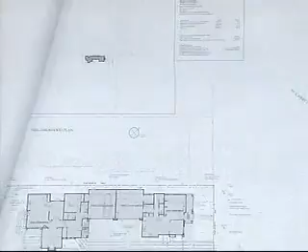There was a different applicant before - Carlos Samara was the previous designer. Does anybody else remember this? So Carlos, for whatever reason, is no longer on board, and so I'm acting as agent now to try and get it through. So let's look at the photos right here.

These are Carlos's work, which I have not seen. Does everybody know where this is?

So essentially nothing has changed from what Carlos had done, other than we had to lower the building height by a foot to meet solar ordinance. Floor plan, layout, elevations, everything is as it was in 08. Some of the windows had to reduce in height because of the reduced floor height on the lower floors, but widths remained the same.

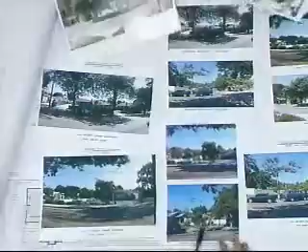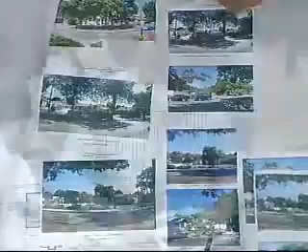So this is the existing house. Do you have a closer photo of the adjacent property to the north, the apartment complex next door? This is the first time I'm seeing these photos too, so you gotta bear with me a little bit.

It's a 2-story unit, and then another cottage to the south. And then the next property is a big church, and directly behind it is a parking lot for the church. If you look at the blow-up, it kind of shows you.

Okay, let's look at this. So this whole section is just grass, it's dirt, parking lot. It's gonna crack.

All right, so take us through the project. So 2 units, like I said - the first one, closest to the street, is a little smaller than the one in the rear, about 400 square feet less. Let's get the floor plan.

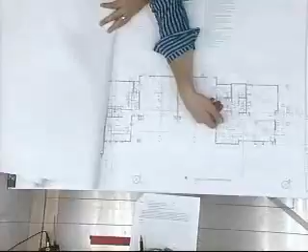3-bedroom, 2-bath, all of which are upstairs on the first unit. Come in the entry off the street, into the living room, which sort of leads you into the kitchen. Small dining, washing, drying, powder room, then go upstairs. Do you want to do it unit by unit?

Sure. I think we kind of know it's a duplex, so let's just look at the elevations. Right? Okay, and we know the layout.

So I think Carlos did a pretty good job at what he did. There's a lot of undulation in the building. We played with a lot of different roof heights, pushing walls back, pulling others forward, thickening. The reveals on some of the windows are nice and deep.

I've got details to show you - different uses of material, like the header over the exposed lintel there, and some wrought iron. Hit a lot of the main, typical details of the Spanish style that's around town.

We've got the scalloped detail on the roof, and we've also got the exposed beam. Some shorter overhangs, some longer. This section tells it pretty good too.

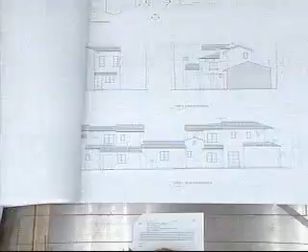We've got outdoor decks up above. The unit closest to the street steps down also from the unit in the rear, so it's less impact from the street.

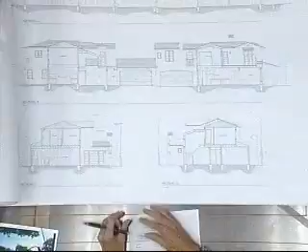Yeah, you have a landscape plan? We do, though I haven't gone through this real thoroughly - Catherine Dole, the landscape architect, couldn't be here today. But for the most part it's water-wise planting, majority of it. I've worked up the preliminary stormwater management plan, and we're working with Michael Gerenser on the calcs right now, so we'll have those for final.

Where's that? My roof plan. So going where? And when we come back in,

I'm expecting the landscape plans will be revised a little bit too, mostly on the back of the lot here where we don't have as much open space. We're going to try and retain it in cisterns and then distribute it from there to be able to control the rate.

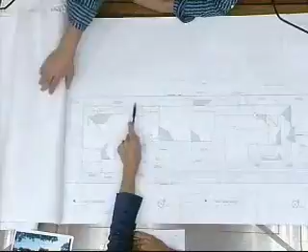Are you using any of these spaces for your private open yard space for your units? Open yard space is all in the rear. I guess the majority of the private for the one in the front would be the decks, and the front yard as well. Where's your legal private open air space? 1,250 square feet, or whatever you're required to have. Yeah, it's in the rear.

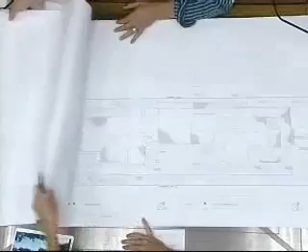So let's look at the site plan. So it's all this area. That's all for the rear unit. Well, it's for both of them. As it was viewed by the planners, it wasn't required to be separated into two.

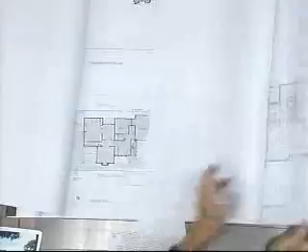Is that it? Do you have anything else you want to add? I don't think so, no. Okay.

We have public comment. Do we have anybody here to speak on this project? I guess I do, actually. I mean, ultimately, I'd like to request final approval.

Is that something the board thinks they could support? Because I've got material samples, color boards, whatnot. Do you have your final engineering? We do have final engineering. Hold on, just a minute.

So is there any public comment? Yes, we had a letter from Paula Westbury. Okay, so closing public comment and back to the board with questions, with the understanding that the applicant wants final approval.

Any questions from anybody?

A question about the street trees. Yes, they're existing magnolias right now, and we're not proposing to change them. How many are there? It's not exactly shown on the plan, at least not on the landscape plan.

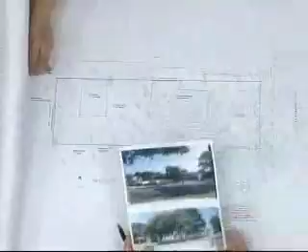It looks like 1, 2, 3, maybe. 1, 2. Is there another one in there somewhere? Two magnolias, 18 inches in diameter. You can see them pretty clearly in the photo there. And you're not modifying or anything? No, those are going to stay as is. What's to be removed is a couple of existing avocados in the rear, an 8-inch diameter ficus, and an orange. And then a hedge along here will be taken out.

Madam Chair, that's all I have for questions. Okay, any more questions?

I had one that I'm trying to answer on my own before asking it, but maybe I'll just ask it. This is the apartment complex to the north, correct, and that's that inset right in here. Correct. So I'm just looking for what is looking to that on your proposal. On the lower level, garages, and on the upper level we've pushed the building back quite a bit, so the closet and the master bedroom.

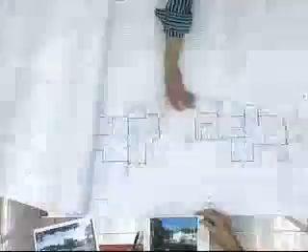Okay. And that's, and this window is, let me look on the elevations. Next sheet. This window. Correct.

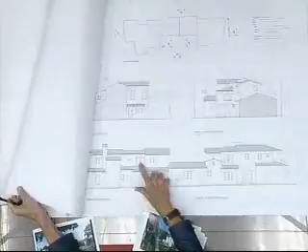I guess what I'm looking at is, even though that balcony is really close to the property line, and it's not your fault, I'm just wondering if it wouldn't be better to move that window away from that balcony, shift it down the wall. And I'll just let that remain for comments.

But any more questions? Okay, comments. Keith?

First time I've seen this, it looks like it's well designed and articulated. And I think if the board gave it preliminary approval before, and it hasn't materially changed, it seems appropriate to at least give it preliminary. It appears that most of the significant architectural details are here, so I wouldn't have an issue with final approval today.

All right, Clay? Madam Chair, I second pretty much what Keith's saying. The only thing I'm not clear on are the finishes. Did you say you had finishes? I do, exterior finishes.

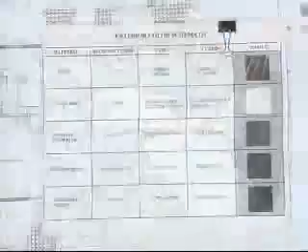So here's a palette, and I've got the actual samples, which I'll go grab. The exterior light fixtures. It's two-piece clay tile.

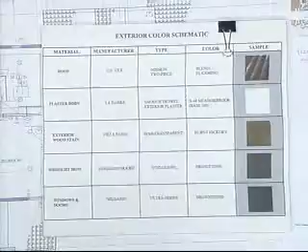Did anybody look at the window details? Yeah, they look like they would. Because it's showing Milgard. Sorry, they initially were going to use Lincoln, I believe, and then they've changed their mind to go with Milgard. So the details reflect Milgard? I'm not sure about that. No, where are the details? Let's look at those. The details appear to be aluminum clad wood. Clad exterior, wood interior, which is, I think, what they're still proposing.

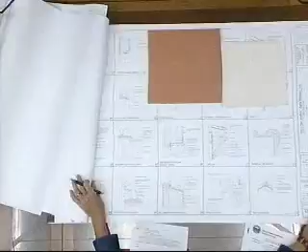Plaster. Exterior tile. There's the roof tile blend, right? Yeah, I think this shows it pretty well. I think we can see it. Okay, but thanks for bringing those in. Sure. What was this one? Exterior tile on the covered porch areas. Floor tile. Yeah.

So let's get back to the window issue. Okay.

Madam Chair, I think just to finish up my comments, I would suggest that we either go with a clad window instead of the Milgard. Those are my comments. I think the rest of the finishes look appropriate.

This was the proposed original. Not the color. The color is right. Is it going to be a black tone? Brown tone. And we weren't going to go over the outdoor living space.

That was all covered. No, we can go over it. Here, just pull that away for a second. What page do you want? The site plan? We can go to the site plan.

Tony, do we have the original site plan from the one that was submitted a couple of years ago? I do, I have it right here. What was the outdoor living space for the front unit? That's a good question, that was kind of one of my questions when we were asking questions. He said that staff didn't separate it, they just allowed him to do the open space back here, but they do have a balcony up in front on the second level.

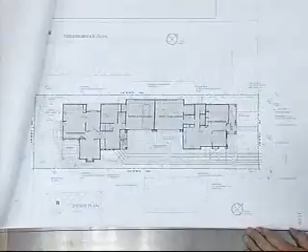The only thing I keep looking at is this little nub right here. Doesn't seem substantial enough of a planter, and I don't know what the path of travel for the vehicular is. If you can make that bigger, or at least reduce the radius of the curves, just to soften it up a bit and make it more realistic. Beyond that, I'm fine with it.

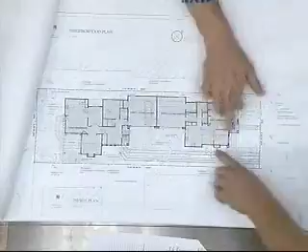Quick question though, where's the trash area? Trash enclosures, garage. Trash. Yeah, let's look at the floor plan.

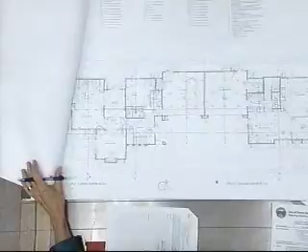No, those are meters. Okay, I'm not seeing it, so we'll want to see where the trash area goes, or make it a condition of approval. Can that be in the garage? No, because what's the size of the garage that you have? So you got a little dedicated space for trash.

Okay, I don't know where. Let's look back at the site plan. Is there any room left? Is it acceptable here? Is that not a large enough space? Except it's in front of a couple of windows, a dining nook, is what they're calling it.

All right, I'm not seeing trash on here, so I don't have any additional comments. I agree with the window comment. I'm not real keen on the tile blend either, but it's not a deal breaker for me. But I agree with the window issue and the comment Chris made about the trash enclosures.

About the softening of the radius of that little bulb out. And the biggest issue for me is the location of the trash, and I think that might keep you from getting final, but I'm not sure. I'm open to a motion, any kind of a motion, whether it's preliminary, reinstated, or what.

Excuse me, Madam Chair. The staff needs to verify that the project meets the stormwater management program requirements before a final approval. Before final, we get final and consent on it, probably. I don't know, let's see.

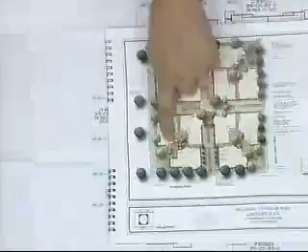Building 200 is on Montecito Street. Building 300 is in the corner - 200 is on the Montecito Street building. Building 300, I'm going to refer to as the one that's not on any of the streets. And then finally, building 400 is on Calle Cesar Chavez.

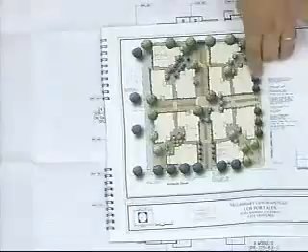Okay. Do you have any other questions, Clay, or should we go to the rest of the presentation? The plans were confusing because they weren't oriented. Right, normal, I get it.

Okay, go ahead. I guess there was a question about triangular panels somebody had. Those are no longer manufactured. There was a company called Sharp, the electronics company, that made triangle modules. They were taken off the market a few years ago because there wasn't a big demand for them. I understand the aesthetic reasons for them, but there is nothing like that available today.

The other issue I would address is somebody mentioned the glare of the panels. I brought a panel here. SunPower has a unique way that we manufacture solar cells. The traditional solar cells you've seen in the marketplace are generally blue with conductors on the front face, and this is often where you get some of the glare. SunPower developed a solar cell that has the contacts, which are these silver lines, on the back of the solar cell, so more light gets absorbed. So this is a 22% efficient solar cell, which SunPower makes, versus about a 14% efficient cell from most manufacturers.

And the way we get that is more light is absorbed, so there's less that's actually reflected off of the system. The other thing, we were just out at the site, and if the concern is the Riviera community, most of the panels are facing south, which is the optimal orientation, and that is towards the ocean. So there wouldn't be anything facing the mountain area looking back down. So most of the panels, if there would be any type of reflectivity, would all be towards the south side, which is towards the ocean.

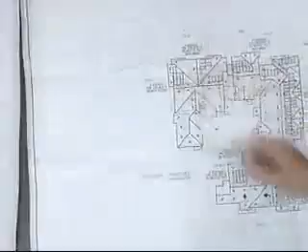And if you look at all the pictures you've given us, there's one that sort of shows how a lot of angles are happening here. And to me, it's visually distracting and very busy. So that's why we wanted to bring it to the full board.

I don't know how visible this is from around the city, but it's in a very prominent spot. If you've seen that third floor from anywhere, you're really going to notice these panels.

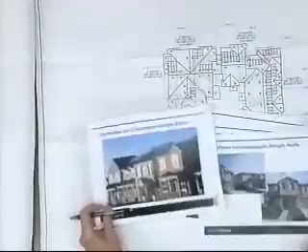It looks great when it's on a square roof as a rectangle, but once it starts getting very busy here, it's very visually distracting. And add the contrast between that and the shingle, to me, that's what makes it difficult.

Gary, you were going to say something else. My concern is also, if you look on A3...

The different roof pitches are going to require different carriaging for the solar panels, and I really think that also is going to stand out because it's going to be perched up quite a bit higher, and those were concerns.

Just a general layout of how it doesn't follow ridge lines and so forth, as most of the photographs that we have actually do follow ridge lines and are somewhat symmetrical if you look through most of the photos. There are some that are different, but the concern is that how they are really jumbled around and not very symmetrical to the building.

I would add that each of the units is getting 1.8 kilowatts, and you have to be careful, because if you eliminate one panel, each panel is 225 watts, you get to about 1.5 kilowatts, and that's the borderline, especially in a coastal area, of having enough power and voltage to turn the system on the inverter. So we want to stay in this system size range.

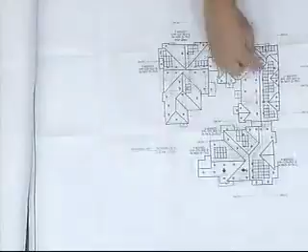That being said, it's a dynamic discussion. One of the things that may help is if we could encroach in that fire area a little bit. For example, this whole row here could be all one nice long row of panels without this kind of offset, and we could probably clean that up, but that would require somebody from fire saying yeah, you can encroach 6 inches or something.

Comments? Two questions. One of them is, I don't understand if there's an HOA involved, why can't the whole complex have one solar system instead of trying to have 1.8 kilowatts per unit? Because that's tying your hands, because you can't take one panel off of here, because then this guy's going to have more electricity than somebody else. I didn't understand that. The second question is, you have a lot of panels here because you have all-electric construction. If you went with gas for your water heating and gas for your space heating, maybe you can cut your electric demand in half, which means only half as many panels we'd have to look at, which then you can have a more pleasing layout. So if you can address those two questions.

Sure, I'll address the first. From the standpoint of why we're going to each unit, there's the California Energy Commission, the state jurisdiction, that has a program called the New Solar Homes Partnership that gives rebates to developers for doing solar, and they're pretty generous. The way to do that is to provide this solar to each unit. You can also do the common area as well, but in this case, they felt it would benefit the homeowners or occupants to hit each unit versus doing one large system, because a large system is considered more of a commercial system and has a much lower rebate, so it would be a much bigger cost to the developer. So the way the rebate structure is, you hit each unit, you qualify for the New Solar Homes Partnership. Technically it's easier because you hit each meter versus being on the front end of the meter and providing power to the whole unit. If you provided one large system to this whole building, a big user may get a bigger benefit than someone who doesn't use as much power. So this is more equally distributed.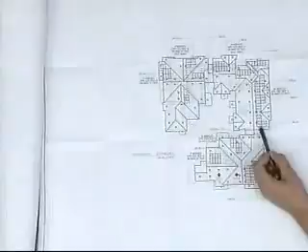And over here, sometimes you're tight and sometimes you've got a lot of room, and here you have no room. So that's something we need to study and look at.

The second thing, I'm personally not okay with having an all-electric house just so you can get 3 extra brownie points on your LEED certification. I find that there's cause and effect, and that's just me personally. LEED is a form that we follow, but it might have a negative effect, which is going to be the visual. So for the innovation points you have, it's also increasing the amount of solar panels you have to put on the roof.

Gas FAUs are very efficient, 98%, and they even have horizontal discharges, so we don't have to get rid of all gas in the structure, and maybe that'll save on the number of panels on the roof and change the design.

Our town was built on aesthetics, so I think there's a balance between the two. But to have all-electric just because that's the only way you can get LEED Platinum, and now we have to have all these panels, I think we need to study that a little more carefully.

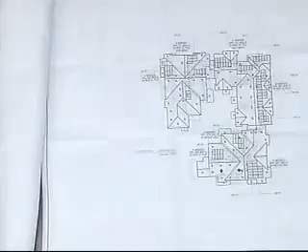You can't, because of the racking system used. Okay, that was what I was wondering. It also doesn't do the 3-foot clearance, does it? Yeah, it gets closer, but I see what you're saying - there's some areas where you can't, and areas where you do get close over here, so that's why he drew that. Right, and so that's what I was encouraging, just sort of cleaner rectangles and squares, and that's pretty much all I'll say at this point.

Okay, I don't have anything else to add. But what I'm hearing, if I were to consolidate the comments, is that everybody wants you to use solar in this project, and it's a matter of looking at it one more time as to how you're doing those panels and making sure you've gotten the best configuration and eliminated the most jogs in the arrays that you can. The other thing I'm hearing, and it was one of my requests, is just to show us a detail of where we think we're going to see it the most, which is at the roof eave, and we'll try that.

Push it back if you can, and confirm if you are creating a different pitch than the existing roof has—we'd like to see you illustrate that. So it looks like you're not going to necessarily get approval today, but there are some things we're happy to provide clarification on.

I'd be open for a motion. May I ask something real quick? In terms of adding, at some transition point, a concrete S-tile to create the access, that actually comes all the way to the edge in the back. Would there be any issue with that, so that we're not walking on the clay barrel tile?

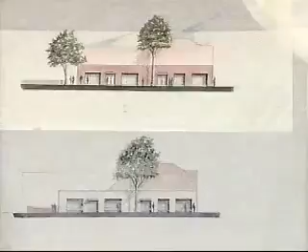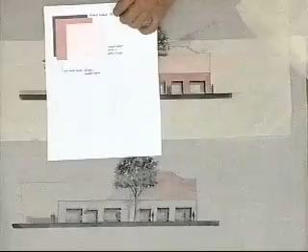Well, I apologize, my printer went dead right at the last moment. But I think the color is actually better on these illustrations here—this is what I presented last time, and this is what we're presenting now. In terms of the colors we're proposing, although it looks very pink here, it's supposed to read white with a bit of a blush—very blush, very blush. If you want to see a building with this color, it's the one on Eastleigh and State Street, that little Moorish building—it's amazing, it's white, but with these, it could be even lighter than that.

The idea is that we would go to a white color, but not refrigerator white. They would have red on it. The background color would be something like this, so I thought it would be interesting to darken the larger building so it can recede back, and lighten the building in front so it can come forward. That was one of the changes.

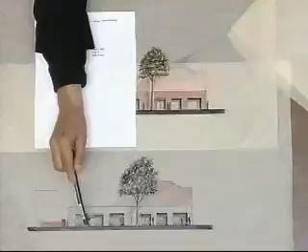As far as the doors and windows are concerned, I thought it would be easier to just get a steel unit that comes all the way down to the ground with some clavos maybe or something like that, and that's probably a cleaner solution for that.

Again, completely open from the color situation. It's tough. Colors are tough unless you get two or three gallons, put them on the building, and see how they behave. But the idea is that we'd go fairly light at the single story, and then go darker on the background of the building.

So for those of you who don't remember what the larger building looks like, there it is. At this point, there's no modifications proposed to be done to the building. Most of the windows on the other side are blocked, and I'm not sure why. When we start working on the tenant improvements, we certainly can expose them, which would be nice. I don't know if there's any code issues being too close to the property line or something. We may or may not be able to do it.

Is that it, Henry? That's it. All right, do we have anybody in the audience that would like to speak on this project? None. Tony, do we have any letters? Yes, we did get a letter from Paula Westbury. All right, I'll bring it back to the board for questions.

Thank you, Henry. On this elevation, is this an existing wall? Yeah, that's a... We have some photographs of that. That's a brick— not a brick. It's a concrete simulated brick type thing, oversized. Concrete block? No, it's not concrete block. It does look like brick, but it's not brick. It's faux brick. We don't have any more photos of it? Do we have any more photos, Tony? Yeah, it is. But we could just leave it. We were just going to leave it.

My only other question was, what are your thoughts on these awnings, these little eyebrows that come over the entry? What I was thinking is there are steel canopies that fit within the opening of the doors, and then have the pin-mounted letters. Underneath, I thought it would be interesting to have a lace pattern to create some interesting shadows. I think the maximum we can project on those is 36 inches or 30 inches, I'm not sure, but that's to carry the signs, as you can see in this illustration here. Okay, thank you.

More questions? Chris? Just wondering, the faux brick wall, where is that? That is surrounding a parking lot, by the property line. It goes— it's actually shown on the elevation. Tony has a plan as well. That wall goes on the De La Vina Street side. So it's far behind the front, yeah. That's supposed to be the property line. In fact, you can barely see it right there. So it is somewhat connected to the end of the building. Okay, thanks. More questions?

Comments? Keith? Only comment is whiten up the pink, but I think the other colors look good. I like the way you've done the bigger mass, the dark to recede, so no other comment. Okay. Clay?

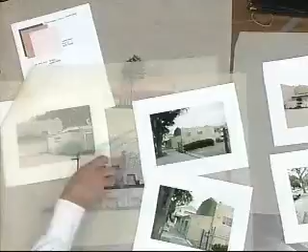Do we have a seconder? I'll second that. Under discussion: Henry, when you come back, I'd like to see some more information, either plan and sectionally, what's going on back in there, just so I can understand it better. It seems to be missing. We will. And I'd like to just state that...

Along that comment, look at where you're going to do it, if you are going to remove the bars and how you're going to treat those windows back there. It's just kind of assumed that you're going to come back with details, and that would include an awning detail, so I don't need to state that. But how you're going to handle that steel detail, whether it's going to be waffle, partially open.

Any more discussion? All those in favor? Aye. Opposed? Motion carries. Thank you, thanks so much, Henry.

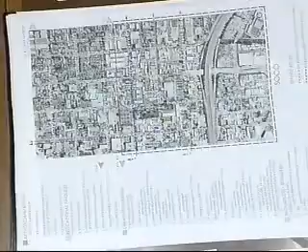What the center does, the idea behind it, is to bring together arts, science, and technology in a way where they can work together as an intentional artist community, giving artists access to ideas, equipment, and materials they wouldn't always have access to. Having that in the heart of Santa Barbara, in the city, seemed like a remarkable opportunity.

In this particular center, there would be 9 residential units and commercial space for the artists to work. It would be live-work in their own spaces, plus a general workspace environment together. Of those 9 artists' residences, 7 would be pretty much permanent, and the other 2 would be for visiting artists, so they can infuse the group with new ideas, rotating on a 6-month basis. All units are rental, and we're not using the word affordable.

We're saying reasonable cost, simply because I don't want to get into all that Section 8 and HUD sort of connotations. But the idea is to have the development be as inexpensive as possible in order to make it affordable and available for artists.

Incidentally, one of the things that happened when we were meeting with community members and neighbors was finding out that other people have tried to put together these kinds of arts centers, and usually it's too expensive for the artists to be able to reside there. So you get this great ideal, but it isn't able to come to fruition. So we're really cost conscious on this project.

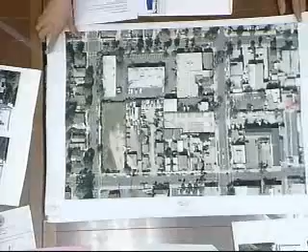And of course, there's Art from Scrap just up from the street. We can look at it here, or go to... I'll walk you through the site on this, if this is large enough for you folks to see. You're on this basic plan, or I can flip over. You know what, this is easier.

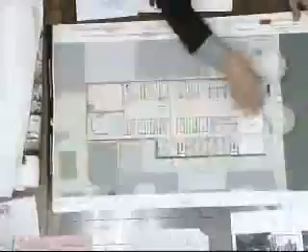So anyway, starting from the center entrance of the site, we've got basically an archway that leads you in from the street, which then leads to the courtyard of the parking at the rear of the site. Facing the street are commercial buildings, let's say, that are the workshops for the artists. Behind them, flanking either side of that same pathway, are the storage areas for artists. And then at the back, on the ground floor, is one of the residential units.

And then at the very rear of the site is the existing pre-engineered steel building, which will be a collaborative artist workspace. That space will have resources not normally available to artists, things like CNC machines, 3D printers, and just equipment that artists normally don't have.

We sort of imagine it'll be shared much the way you would share at a photo studio before digital, before the whole digital industry took over, where you have your time that you know when you're going to be in there and get used to that equipment and share it.

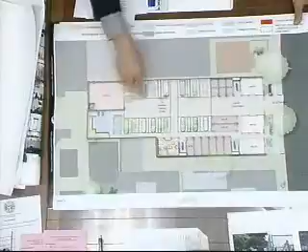Also, you'll see in the plan coming through, this is the extent of where the regular pavement is. This is where the permeable pavement is. Around the perimeter are the cisterns for the water collection. This is the open area back of the site.

At the front, one of the things this is really meant to be is a classic urban infill project. So it sets back from the street 21 feet from the street edge, and 9 feet back from the sidewalk, which creates the first public area. There's a public space in front of the building with benches so there are places to sit, as well as the potential down the line for public art and a place for people to congregate.

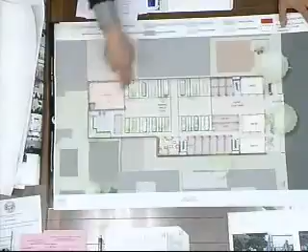The second public area really is the parking area. Our hope and intention is that the parking will not be overly utilized, and that it will be a space where people can be. We are meeting the planning requirements from the city, which require 14 parking spaces, but the intention for how this community will operate is that people will be walking to the site, riding their bicycles, and presumably parking less, since they live here and have less need for that more traditional means of transportation. There's also an internal street which happens along the buildings here, which is our internal paseo.

I'll take you to the second floor. The other thing to point out is that pretty much all the workspace is on the ground floor, plus one residential unit because of handicap access. Then at the second level are the remaining 8 units. They're all work and live spaces, so artists can work in their own private space while they're downstairs collaborating.

And then on the third level, you'll see that's been stacked entirely over itself, and you'll see all the solar panels, the arrays. This is a section with the heating for the hot water, that kind of thing. There are even solar arrays on the original building, and where there aren't solar arrays on the building, there's green roof. That represents all of that.

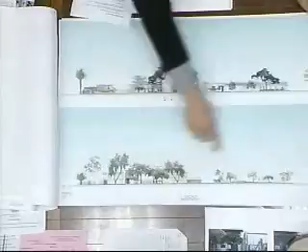Here are the elevations, which give you street context. This is us here, but what you're seeing are both sides of the street. So this is the whole side of the street facing west, and that's the side facing east. That, for instance, is Art from Scrap, just to get your bearings, and that's the building adjacent that just recently was approved, and that's Planned Parenthood. You'll see the intention here is to really stay in the same scale as the neighborhood.

We did study schemes. I'll talk a little bit about where we are in the approvals process and planning, but we've gone from Scheme A through, I think, Revision K at this point. The reason for that had a lot to do with how to fit the parking on site, how to get the right balance of residential to commercial use, how to fit within Measure E requirements, and also stay within the right scale for the neighborhood. We did look, for instance, at a 3-story scheme along the way, and really felt that the 2-story scheme was more compatible with the neighborhood and yielded the right kind of feeling along the street.

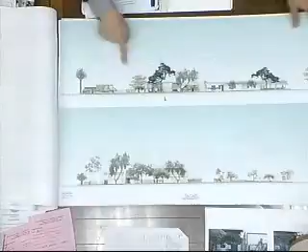2 of the city's trees that you'll see are remaining. This was actually on our next door neighbor's site. This one's on ours, so we keep those.

These are some of the elevations looking from the different sides. That's the south. This is internal—that's the north, excuse me, because that's the opening of the parking lot. This is the internal street, let's say, what you see when you're walking inside, so there's lots of glass facing internally. The reason why on the outer elevations you didn't see a lot of glass is simply that we're on property lines, and therefore we have a 2-hour rating, so we had to maintain that.

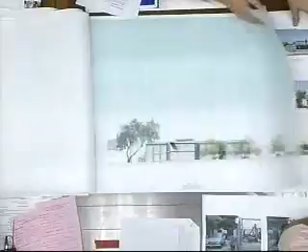The other internal street, again, you can see our new buildings up front with all the glazing, more glazing at the back side of the unit. Somehow I lost the front elevation—I think it was at the very cover. I'm going to go back.

Here it is, front elevation. Sorry about that. And that gives you the overall view.

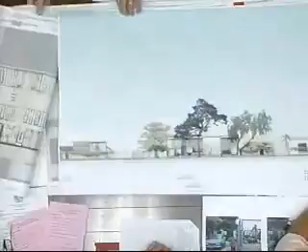And let me just see what else I want to share.

I wanted to tell you where we are in the planning process. We filed for a PRT around May 20th in order to get the planner's comments on the original project, which at that point was Scheme A. The comments we got were really relative to Measure E, and also things about environmental review.

So in Measure E, we were looking at that original scheme. We were looking for about 4,000 to maybe 5,000 square feet of Measure E. The planners at the time felt that this project, although they were interested in it and excited about it,

didn't feel that they would be able to support it going through on a point of view of community priority or economic benefit. So they did ask us to re-look at that and see if there might be another way to put it together.

Interestingly, at the genesis of the project, the very first thought was about it being more of a live-work space, and that's how that scheme then got more developed. We were also showing only 9 parking spaces at the beginning, and as a result of moving toward more residential development, we're now up to 14 parking spaces. That put a little more pressure in terms of the outdoor area and less development on the site.

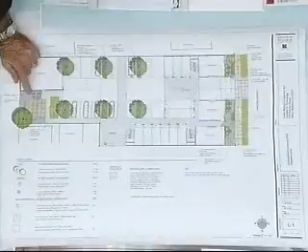Inside here, we have a native desert willow we might introduce with an understory of coral bells, which is also native. This structure on the ground floor, like the one Barry pointed out on the 2nd floor, is a green roof, and so will this be. This is a little informal gathering space at the rear of the site, with a seat wall, small canopy tree, and planting underneath. That's the extent of it as laid out here.

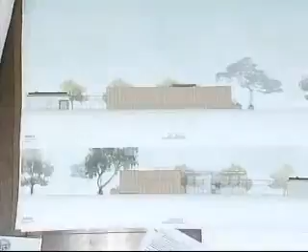So that was one possibility, but what's being shown in the drawings is another possibility, which would probably be easier with the building department for approvals. It's basically a pre-manufactured insulated panel that's 2-hour rated up against the building, and it has a cementitious ceramic finish to it.

It's probably best described as a hybrid cementitious ceramic. One of the product names is the 600 panel series, fire rated wall system. Another one is the Omega Fire. This gives you a little indication of it.

And then the fences in the drawings are implying glass or some sort of transparent material, or is that? It's a metal fence, not glass. So when you say metal, like a perforated material that you can see through? It's a metal mesh on a rectilinear grid, painted, so it's not like chain link. It's meant to be as transparent as possible, but on an orthogonal rather than a diamond pattern like you'd see with chain link.

And you'll notice that because of the way we situated a large length of that parking lot, there's no requirement to rate along it, so it's open with the fence along it.

Madam Chair, I have a couple questions. Going back to this fence, it looks like it's probably around 12 feet high.

Is that a conditional use on the property line to have a fence that tall, or do we have any issues with that height? I think it's commercial, so we're allowed to build on our property line. Our building could be up to 60 feet. So I don't think there's a problem with it.

This building back here is existing? Yes, the existing metal building in the rear of the project. Correct. What is this dotted line here? That represents the roof. Let me just make sure.

So is this building changing, or is it staying? There's another one here too. Those are other buildings adjacent, in the foreground. We're not changing the existing metal building—its envelope will stay the same in terms of shape. It'll get restored, change color, get new doors, windows, roll-up doors, and solar panels on top.

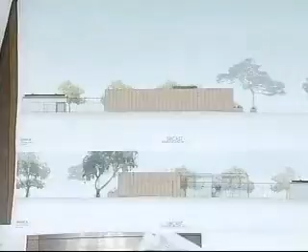Do we have a photo of what that looks like in this packet? We definitely do. If you need, I can pull up others. That is this building, right there. There's another picture.

And I think that was showing the neighbors with the dotted line representing that building—that's the neighboring property. Got it.

Any more questions? Not yet.

Two questions. On the floor plan, there were 11 storage units, but there's 9 residential units. Did I miss that 2 of them are for the visiting people? Actually, it's 9 residentials total, including the visiting. The other 2 are servicing the commercial spaces as well, the collaborative space.

We haven't written the operation program, but the intention is that each artist would have their own storage unit. But there's always need for more storage, plus 2 more, plus a little extra.

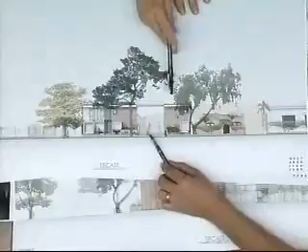And then if we go to the main front elevation—I think we have to go back. What is the height you're looking for on this bridge? I noticed it was dimensioned as 19 foot 6 inches. Is there a certain height needed for vehicles and cranes to get in there? What's your minimum? It's just the fire department requirements.

Basically, our building is 21.4, I think, to this parapet line, and this is just showing a railing going up above that. So that's another, not even 3 feet. It's looking the way it's drawn—it would be obviously 42 inches if it's a railing.

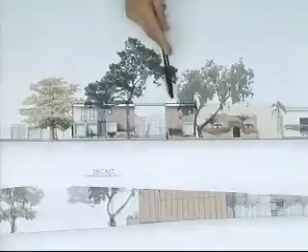So if this was 21 feet to the top, you're about a 9-foot plate in each of your units inside? 8'10". Right on, okay. I figured that out, thank you much. Sure, Gary?

Yeah, I had a couple of questions. Most of them have been answered about the fencing. The gate in the front, what material is that?

That's a metal gate. In terms of operations, that's intended to be open during all normal hours. It would only be closed in the evenings, but it would be a metal construction.

And what's the height of that gate? It's not in front of me, but I'm going to bet it's around 10 feet, because I think it was the same height as one of the units. Does it show up on any drawing? It would show up on the architectural set, which is way at the bottom of the file. Let's see if we can answer that.

Okay, it's exactly lining up with the plate, so it's going to be 8'10". And you got the 8'10" because that's the height of the containers?

Exactly. And the front facade of the building, are those containers, is that going to be the material of the containers, or is that going to be glazing? What is that? Well, it's both.

As proposed? As proposed, the container units get modified, right? Because basically they're just a construction form. So facing the street, as you'll see in the illustrated drawing, there's lots of glass, and the intention is to have that facade very activated with large glass windows.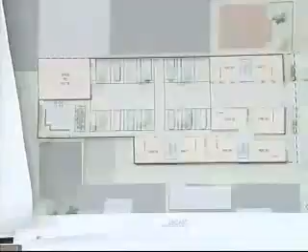Right, and so I guess we can always look at if we can get more. I mean, the intention also is if people aren't parking their cars in the parking spaces, we could park our bikes there. Yeah. Okay, in terms of the planning process with the city, it's not like we can mandate that, but we're hoping that's how the operations of the site would be managed.

Okay, and then the fences that were being spoken about, the mesh, are you planning on putting vines on those, or is there a reason you're leaving them open to see in? Well, I think that's a detail we have to sort of discuss down the road.

Okay, and then final question: the gate, the entry gate, those are sliders, goes to either side. Correct. In fact, it slides internally, against the wall. Right, yeah. Okay, those are all my questions.

I had just a couple about the gates. Did you talk to transportation about that being? I think there's not an issue with commercial, with the gates being right on the property.

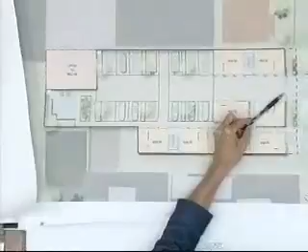Oh, we're not within the 20 foot property line? Within the first 20 feet, you don't have to pull off of the street. We're 21 feet off of the street. So, off of the sidewalk, out of the right of way. Was there?

Transportation will need to check that. One of the things transportation looks at is the visibility as the car pulls out to pedestrians, and the relationship of the setback versus the throat width.

But don't they also look at the ability to pull completely off the right of way in order to open and close the gates, so you're not blocking? I know in residential they look at it. They look at it in commercial too, but sometimes they also look at the hours of operation for when the gates will be closed. Just check that about where you're locating that gate. Yeah, we will. Transportation has it, but I'll make sure they didn't miss it and surprise us later.

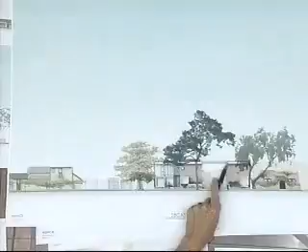And then I had just one more question about this catwalk bridge. You were mentioning it's a requirement from the fire department. No, the height - I was just saying we have to keep it above a certain height, that would be the only fire department requirement.

I think someone was interested in knowing if we had heavy equipment coming in, maybe a crane or something, and we haven't been considering that. It's really just to give a little expression on the front of the building to tie things together from an architectural point of view, and it also gives us access from one side of the roof to the other side, which helps with maintenance.

And then I noticed on two of the elevations it looks like you have some kind of vine growing on the fence, on this one and on the south elevation. I was wondering where that came from. That's the green roof - there's the bridge, so there's the green roof and the green wall there. I think it's also a little bit of artistic license, architects wanting to introduce landscape elements.

So I'll defer to David on this - David's got to figure out how to get the vines to grow up on that bridge. I might be out of line on that. And it shows up here too. Point taken - your challenge, should you choose to accept it. Okay, didn't know that wasn't in my brief. So, comments?

Keith: Thank you. First of all, I'd like to say I think the program here is really intriguing and great, so I have real support for that.

To look at the site planning, maybe starting at the street and working back - I like the front setback. I think the overall site diagram with the central auto circulation and reusing this building back here seems to make sense and be the right one.

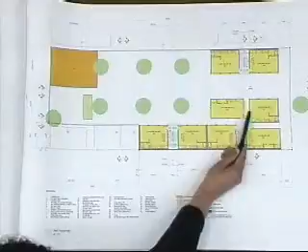I think the relationship of the fenestration here, and then likewise here, this guy's kind of turning a blank wall to an open space. So I think some of those issues need to be studied in that area to open up the livability and views of those units.

So I think that's kind of it for the site planning thoughts. It seems like solar panels work pretty nice on a flat roof, unlike 15th century clay tile.

I look at the property line walls, and I know that potentially down the road someday someone may build another commercial building zero lot line to zero lot line, but I don't know how quickly that'll occur or what the likelihood is. But I would like to see some attempt at some articulation along particularly the southern property line wall with the upper floor to create something other than the big flat plane that we have here.

And it seems like these stairwells that pull back from the property line might be an opportunity where the building envelope could move in and we could get some sort of articulation there.

Since with your stair access, you don't have any external walkways, which I think is really nice. So we're not doing this kind of motel balcony scenario. But that also gives you some opportunity that maybe these upper units could slide in this direction again to create a little more something on that property line. So anyway, throw that out there. I would look to try to do something there to articulate that.

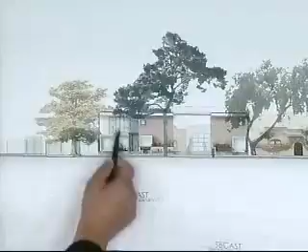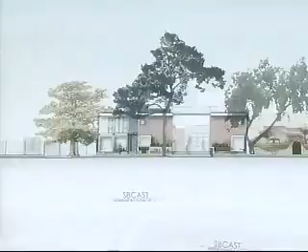In my mind, I think these two forms are more successful than the one that has more glass. I kind of like the contrast between the bigger opening at the street pedestrian level and the smaller unit. And if you look at a lot of the Spanish stuff around town, there's this kind of play between scales of openings. So I think maybe you could exploit that more and have a more direct relationship with some of the scale tricks that the Spanish Revival does, but in these new forms. So I kind of like this maybe more than that, and I guess I'll leave it at that.

And you talked about maybe using wood to detail some of those secondary elements. I like that direction, and I would encourage you to maybe study having more secondary scale-giving elements, particularly at the street elevation, and whatever those are, some sort of projections to throw more shadow and give it a higher level of articulation, particularly at the pedestrian frontage.

But I think the mass, bulk, and scale, 20-some feet high and two stories, is totally reasonable. I think there's those studies of some articulation and then the secondary scale elements architecturally. But I like the general direction.

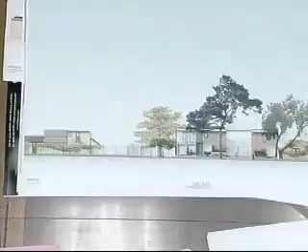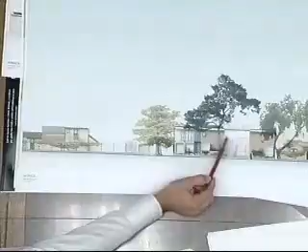Of all the things on the project, this seems a little out of place to me. I'm not sure if there's another resolution, or if the stair on the north end can come up high enough to create another play in the massing, not requiring us to connect directly over for that access point. Not to say there couldn't be something bridging over, but maybe something lower that acts more like a second-level connection, something that creates that entry arch, so to speak.

I second some of Keith's comments about this front elevation. I find that this part of the building seems fairly resolved, a really nice composition, and then this almost seems like an appendage that hasn't quite been resolved. Applying some of the sensitivities from this and the inner elevations might inform how this comes together, and that's an area I think could be improved.

Likewise, to Keith's comments about some of these studio units on the second level and the orientation, trying to maximize light for each unit, I think would be beneficial.

But the last comment, I think it'll be brought up a few more times, is the skin on this side and the fence. I like the sort of refrigeration panel, insulated panel look. I think maybe with the play of the volumes pushing in and out, that'll help simplify that and not be such a large mass. But I think it needs a little bit of studying, maybe the color, maybe figuring out the detail on that.

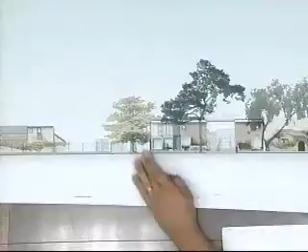The difficulty I'm having with this project is this two-story mass next to this commercial building that's one story. On this side, I don't have a concern at all, because you're here first and they have to marry with what you're doing - I agree with Keith, opening up these sides is a brilliant idea. But over here, having the two stories next to here is too hard and too harsh.

And I have to say that you're coming second - they're here, and of course I understand this is going to get demolished one afternoon and there'll be another 2- or 3-story building. But until that happens, the composition of this building, which is well defined and detailed and landscaped, next to yours doesn't look proper.

So I was wondering, floor plan wise, what are the options. I asked on the first floor how many storage units you needed, and there was actually 11 versus the 9. Well, let me finish the thought - go ahead.

I'm looking at the second floor plan. I'm wondering if there's a possibility of losing this unit on the second floor, and if you can relocate it down to the first floor. Okay, if you can't, you can't.

But what I'm sensing is this hard edge coming up here is too strong and too dominant next to this existing building. I understand this existing building is commercial and you have the rights to build straight up, but we also have to study the character and how it fits with the adjacent neighborhood. Other projects along the way, if they're already going up next to a two-story building, then it's a natural condition. So I was wondering if there was a possibility of moving this first unit to make it only a one-story unit, and then the two-story further back.

One of the things that concerns me is the height of the fences and the gate. I think they're not really human scale - when you come up to this building with a 10-foot high gate or 8'6" high entry, I think it's too much and needs to be dropped down.

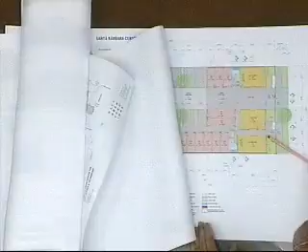Another thing that bothers me on the site plan is the entry. We're walking up stairs, so we really don't have ADA access as we go in here. The only ADA access is up through this gate area. This concerns me, and it concerns me how we approach the building.

I know there was some talk about how these two incorporate well with each other, but what's not working well with me on this project is... Which page do you want? 2.1, let's see. No, I want the elevation front. You want the colored elevations? Yeah, colored elevation, right here. Which one? The front street elevation. Front would be right here.

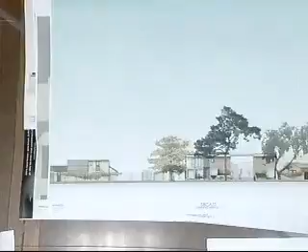So what concerns me is about the focus of the entry - there isn't a real focus of where the entry is. This is our automobile entry, although you envision people walking through there using it as open space. This courtyard area should be a little bit more inviting to the public, and should be accessible ADA, visible to the public that this is where you come in to visit somebody, that units are through these doors. Maybe with some canopies or something that articulates that.

As far as that goes, I talked about the fence height and building articulation. That would be my focus.

Thanks. Okay, thanks Gary. Chris?

I love the project also, done a lot of really nice things here. I think Keith had mentioned trying to incorporate as much planting as possible, and that's obviously down the road.